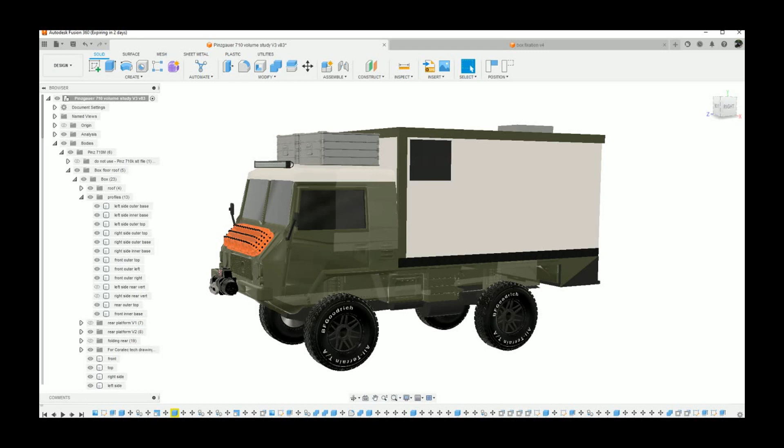Okay, so this is just to show how I intend to build the box and attach it somehow to the frame of the Pinz. So the box will be composed of these four panels, one, two, three, and four, the front one here.

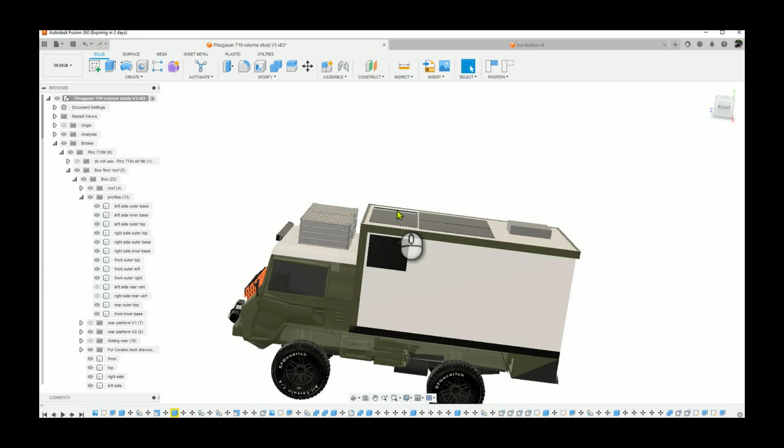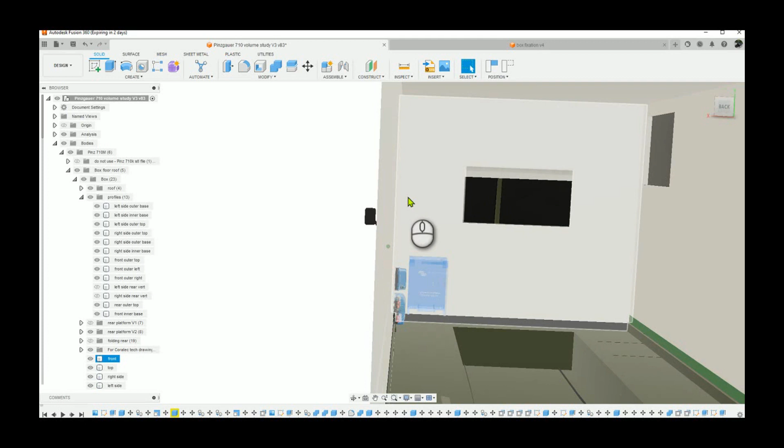They will all be glued together rigidly, and these L frames made out of fiberglass also will be glued to hold them in place. The panels are made out of fiberglass sheets on the external side, and inside the core is made out of recycled PET, so they're insulated panels, and they are very rigid, so there's no need for any frame inside. The panels themselves are structural and quite light.

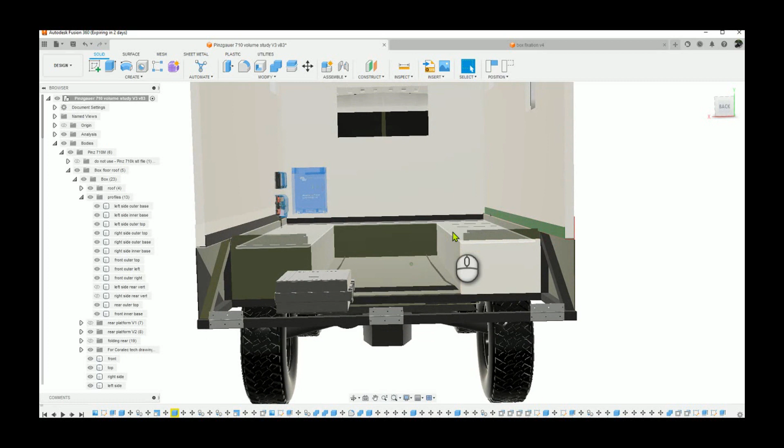So now, as this is the frame of the Pinz here that we can see in green, I've already made some measures and checks, and the frame can move up and down. It's not exactly always flat as you pass over bumps with the wheels. That's normal. At the moment, I measured about 6-10 millimeter difference from one corner to the next, but it can probably be more than that depending on the situation.

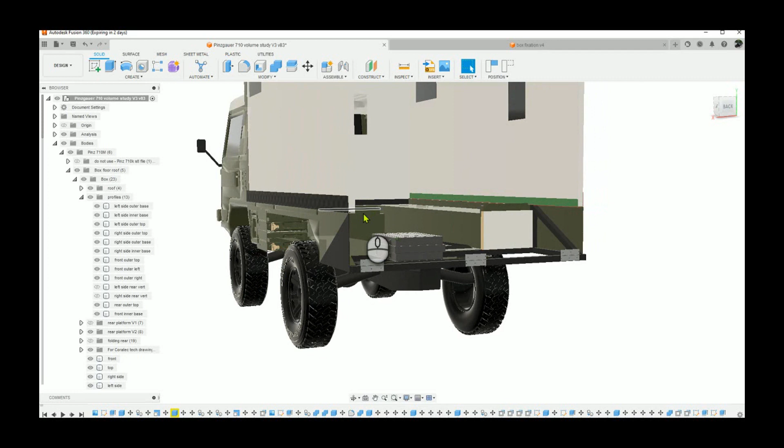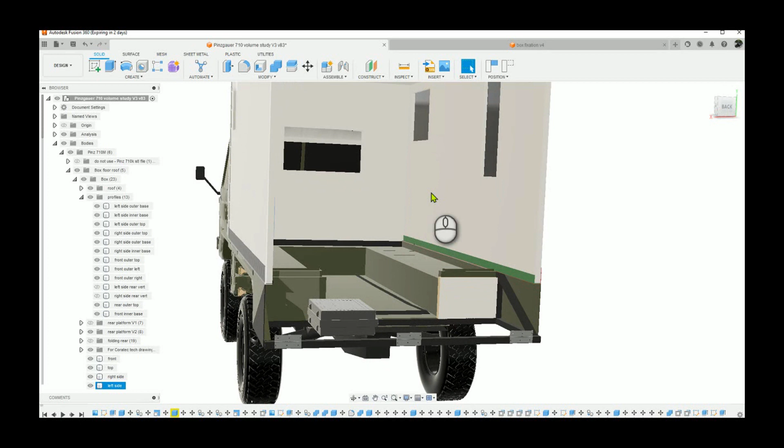So if you attach the box rigidly to the frame, you are likely to encounter problems as the box is rigid and cannot really deform, so cracks can probably appear. So I need to find a way for the box to be able to move a little bit in relation to the frame, so it will be able to move up and down, and I will show you how I'm going to do that. It won't be able to move left to right or front to back. Let's see how I want to do that.

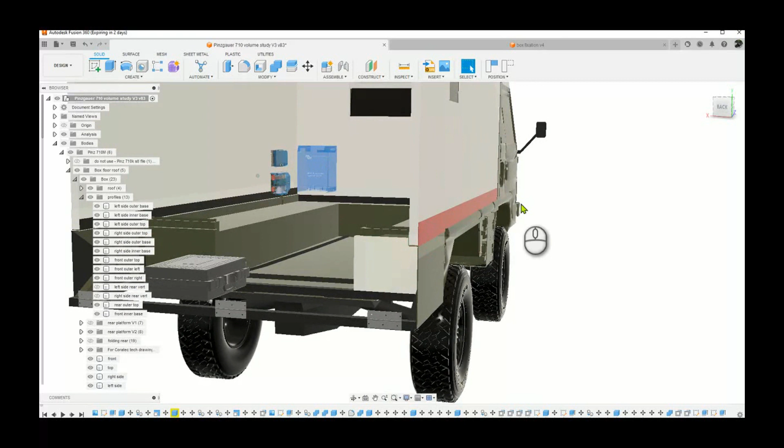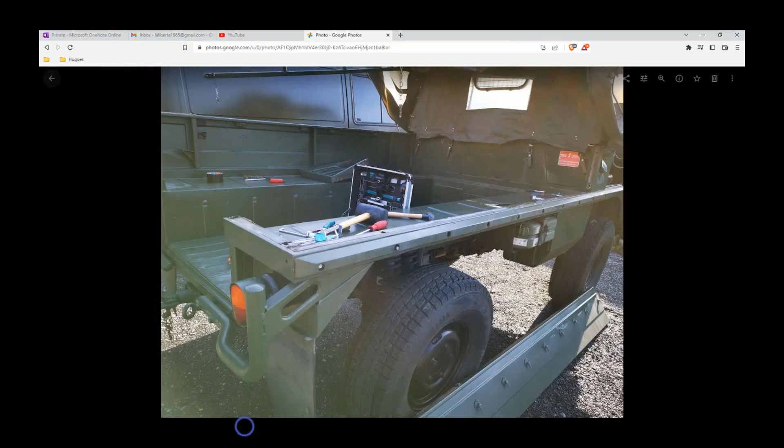So basically, you see this L profile here. That's made also out of fiberglass, and that red profile will be attached rigidly to the frame. So if we look at the frame of the Pinz, this gray part here, it's here on the picture, so you can see I've removed one panel already, and that's the lip here that goes on one side and also another one on the other side. I still have to remove the panel here.

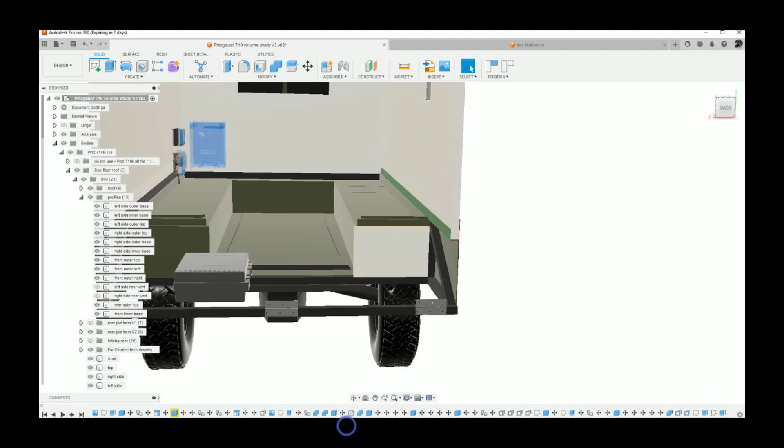So basically, this red L profile will be attached to the frame. The L profile can deform a bit, it's made out of fiberglass, but I will reuse the holes here to bolt that L profile to the frame. So that's the red one, which is again attached to the Pinz frame.

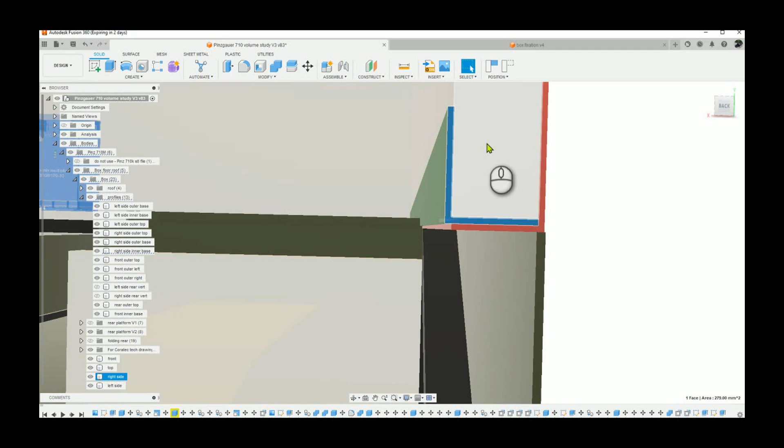Now that panel will be protected by another L profile made out of fiberglass as well. This one will be glued to the panel, so it will be kept together. This is in order to protect the core foam that is exposed here at the bottom. So this is just for protection, basically. Now the thing is how to allow movement between the frame and the panel. So let's move here. We can see a bit better.

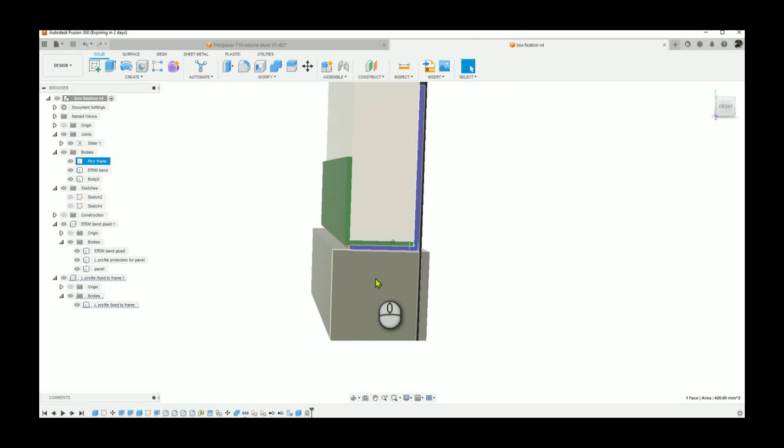So this is kind of a cross section of this setup. You see the red profile that is attached to the frame of the Pinz. You see the panel and another profile that is glued to the panel. In order that this thing can move up and down, what I intend to do is use this black membrane here. This is made out of EPDM.

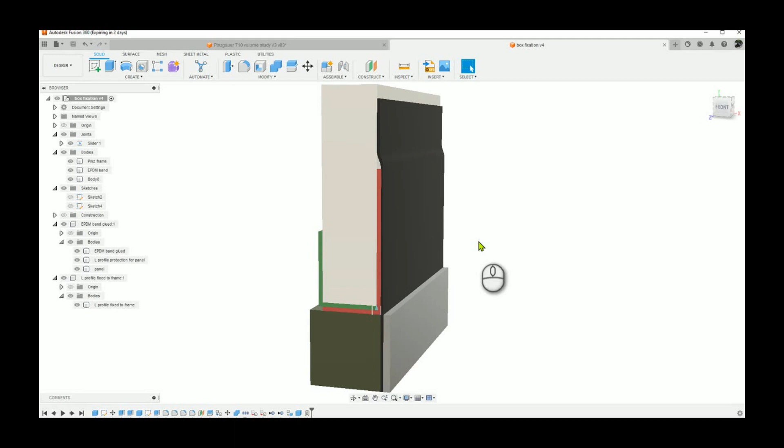EPDM is synthetic rubber, which is very tough, resistant to ultraviolet. You can clearly use that outside. It's used in the automotive industry for seals and different things, so it's quite resistant. It can be stretched without breaking. Most likely, I will go for a 2 millimeter membrane.

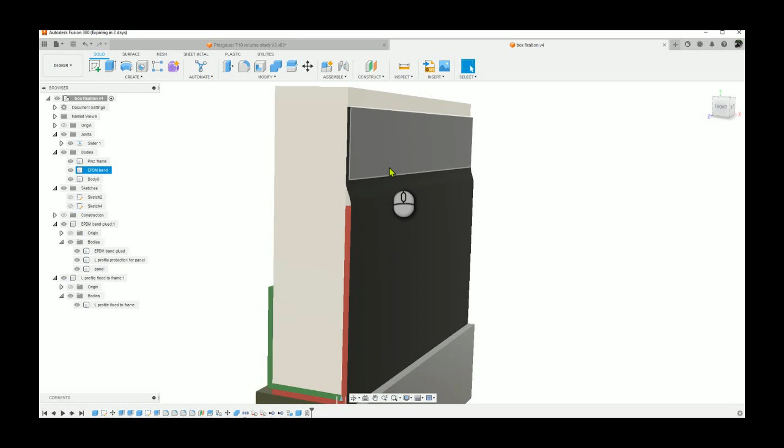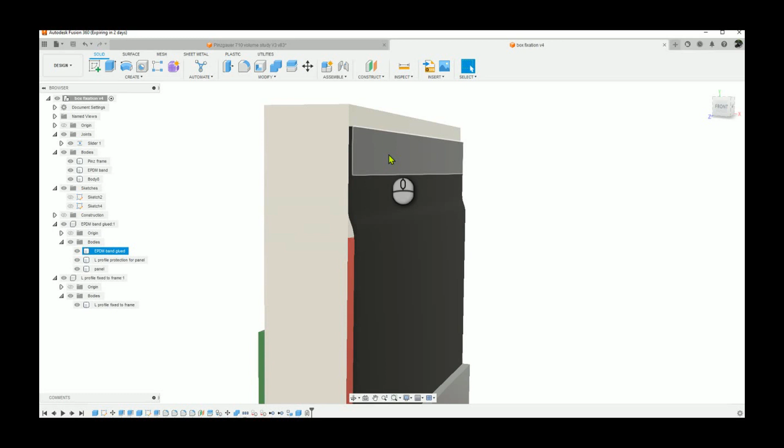The top of the membrane will be fixed to the panel, probably glued. I will try to avoid using bolts and screws here; gluing this membrane will be better. I've checked already. There are specific glues for EPDM. I've worked already with EPDM before. For example, 3M VHB tape is pretty good to glue that, and it's quite resistant. So that EPDM membrane on top will be attached to the panel.

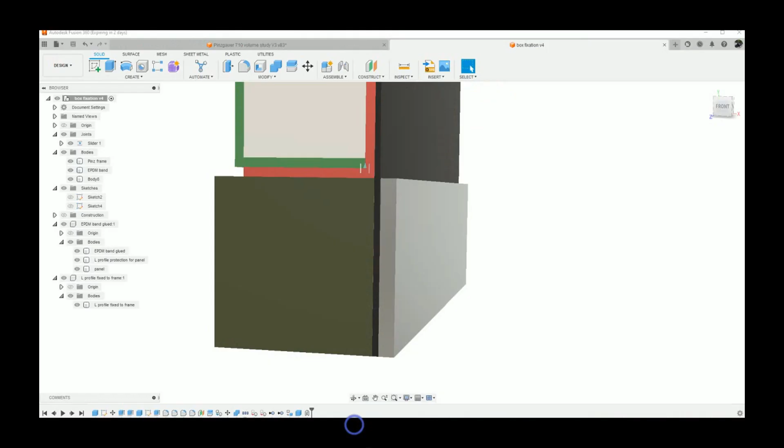It will go down along the side and will be clamped on the side of the Pinz. So basically I will remove this wooden bar that is bolted to the side of the Pinz and replace it with an aluminum profile that will be screwed into the Pinz, so the EPDM membrane will be clamped here and won't be able to move. So this way I can also easily remove that aluminum profile and lift the membrane to inspect there.

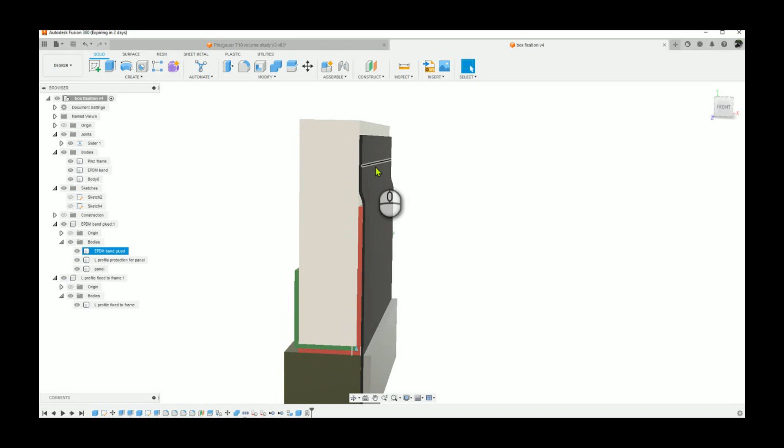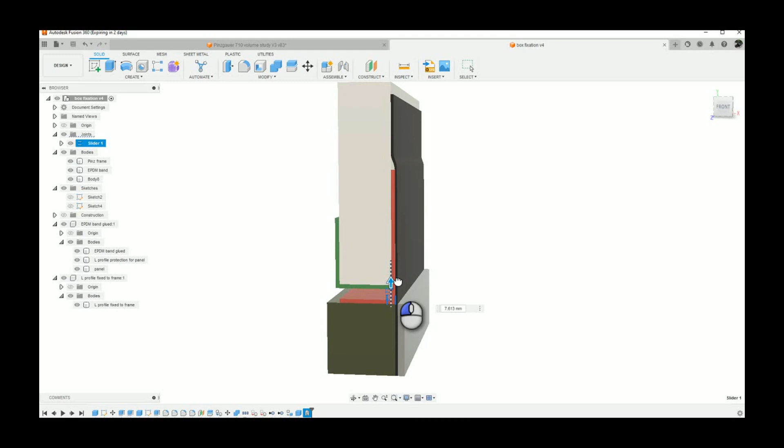The membrane will also allow for a watertight area here, so the water will not be able to enter, and also the dust and anything that can get into this joint. So basically with this, I can animate a bit. The panel will be able to go up and down and be held in place with this EPDM band that will run all along the frame on both sides, also in front of the box, so that it can go up and down only for about maybe 10-20 millimeters, which should be sufficient.

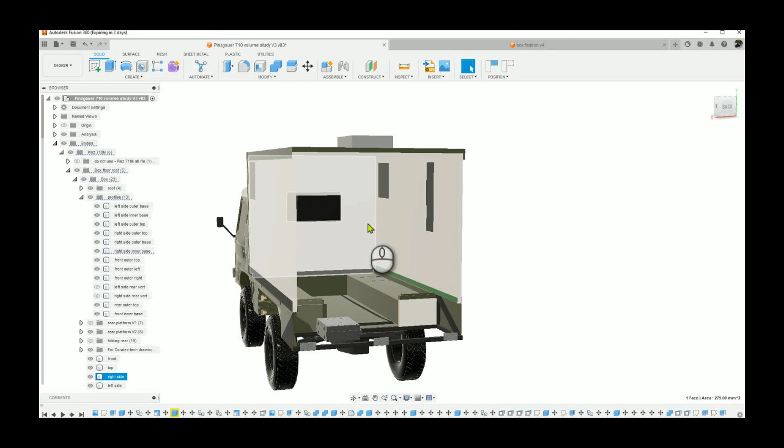Yeah, so that's how I intend to do that. If we go back here, basically these 4 panels will be able to go up and down, but won't be able to go left and right. I will probably put some guides here so that the base of the panels cannot move laterally from right to left. And also in front the same, I will just maybe get this out of the way.

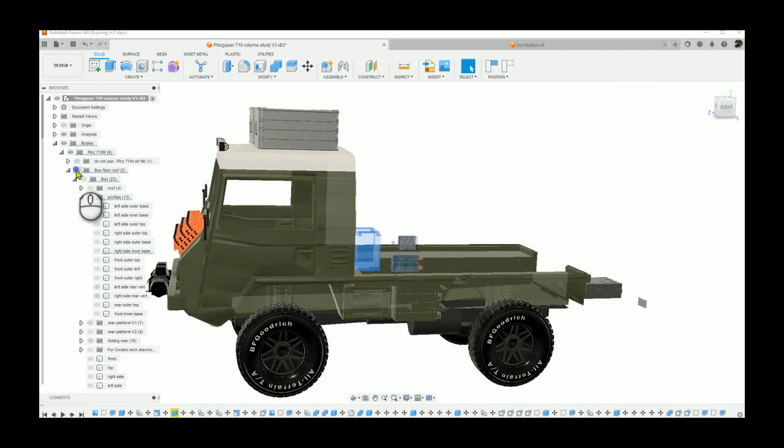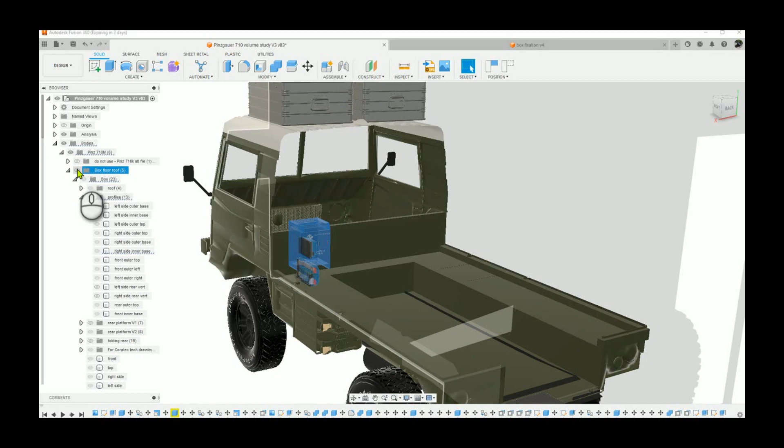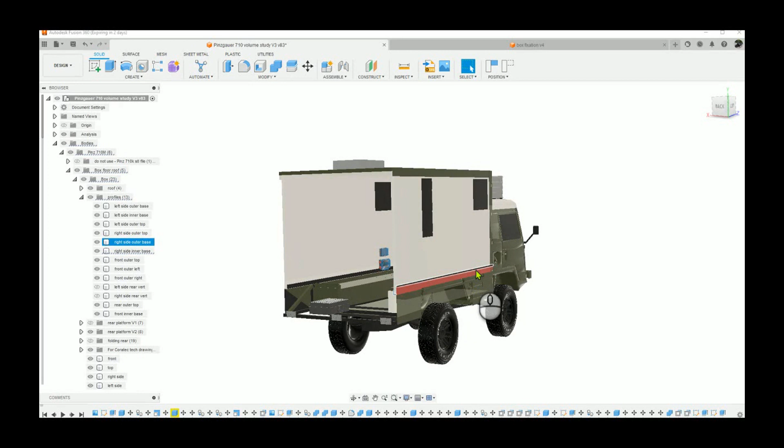The same system here, this EPDM band will be attached to this part of the frame and will retain the front panel as well, so that it does not move out, and some guides as well here to hold the panels so that it cannot move front to rear. Yes, and so there will be this EPDM band running all around the box, front, left, and right, and that should be sufficient to hold it in place.

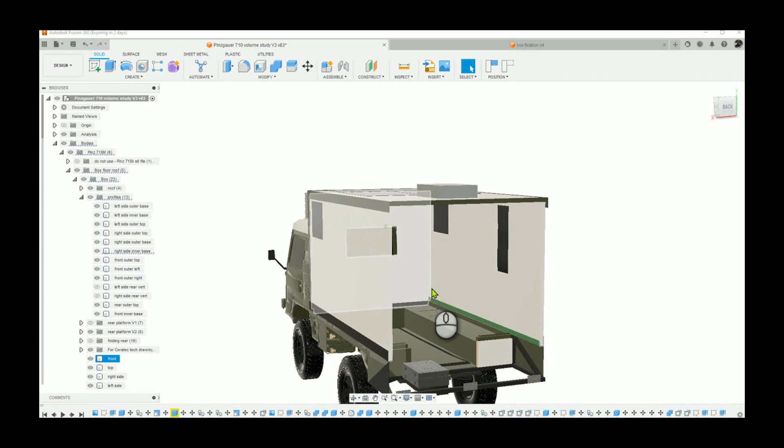There will be some wind pressure when I drive on this part, but again, the box is rigidly fixed all together, all these panels, so I don't expect much movement of the box. Eventually, I can probably put some sliding screws into that wall here, and that would retain the box front to rear and still allow the box to go up and down if need be.

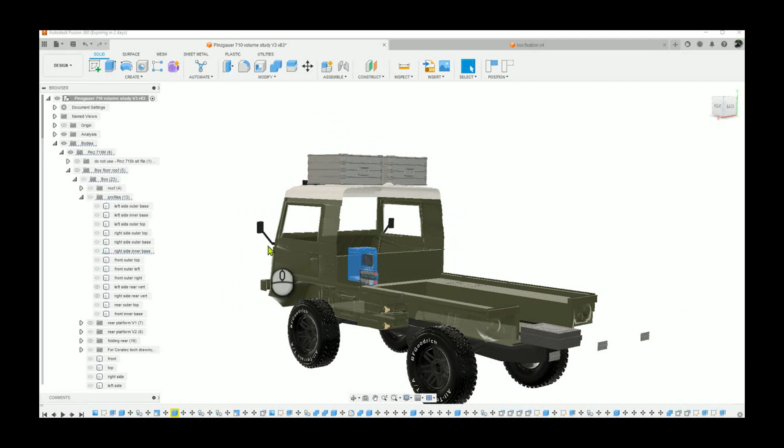So that's the idea for now, to use this system to have a box that can still move and not break when the frame of the Pinz is moving. So that's the idea. Your feedback is welcome, of course.